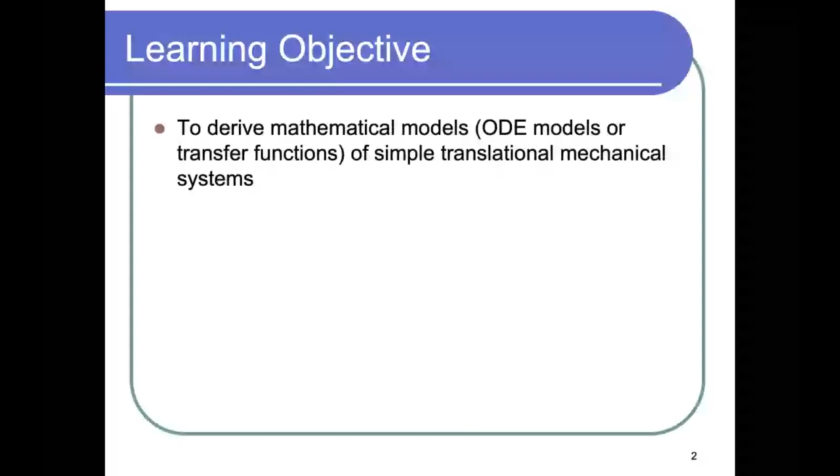So for this part, we'll talk about modeling of mechanical systems, and then we'll talk about modeling electrical systems. And then we'll start talking about differential equations and their solutions and the Laplace transform. The reason we care about differential equations in control is that usually we care about dynamics. Dynamics are things that can vary with time, and differential equations are one way of capturing dynamics. So the objective here is to derive mathematical models of simple translational mechanical systems. So the first step in the design is really the modeling step.

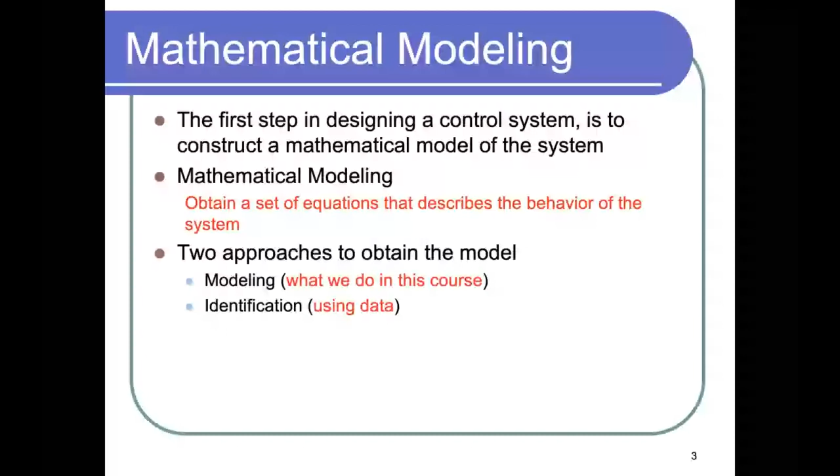And one thing that I want to mention is that modeling can be done in a physics-based approach, like what we do in this course, but it can also be done by other means. You can use machine learning, you can use whatever you want to use. There is what's called system ID, system identification. So really, you don't know how to model this. This is applicable for, let's say, social systems. You don't know the model. So you give it input data and you observe the output and you try to build the relationships experimentally.

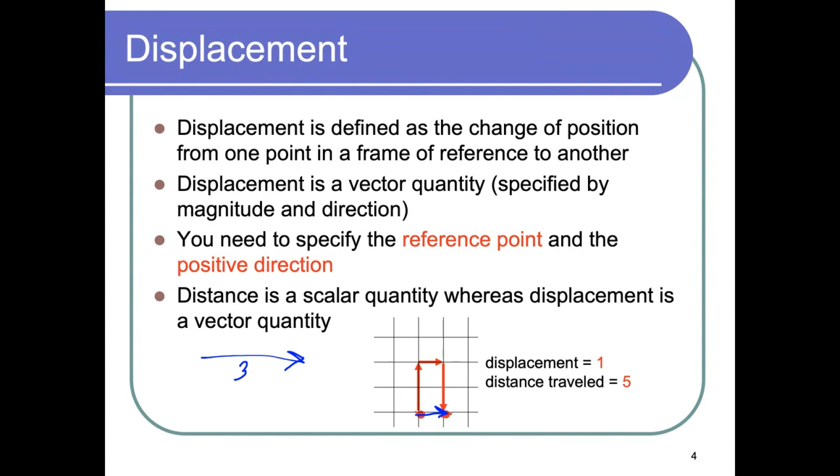So for mechanical systems, we have displacement. Really, it's a vector. It's not like distance, which does not have a direction. Displacement has a direction. So we mentioned last time that, for example, if you move from this point to this point, the displacement is 1. Why? Because you're just 1 to the right, but the distance traveled is 5. So the distance, because it does not capture the direction, has a different value than the displacement sometimes. But if I just move in one straight line to the right by 3, then the displacement is 3 and also the distance is 3. However, the displacement gives me more information about the system because it tells me the direction of that movement from one point to another.

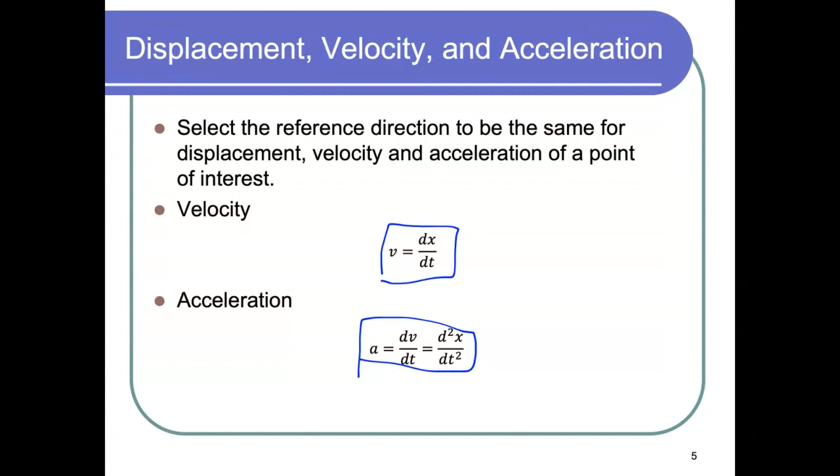All right, so with that, you have the derivative of the displacement that captures the velocity. Velocity, again, is the same as speed, but with the direction. So it's a vector. So velocity is really the rate of change of the displacement. And you can also have an acceleration, which is the rate of change of the velocity, and that is the double derivative of the displacement. So all of these things are things you saw in physics 101, but you can consider this as a quick refresher. We also need to have a reference direction, which is the direction that we consider to be positive, so that anything in the opposite direction is considered negative.

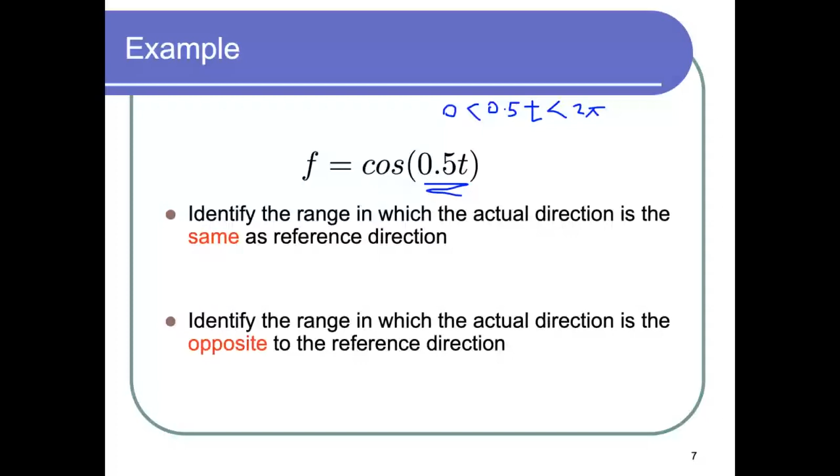We also discussed the following example, f being cosine of half t, and we identified the range of t in which the direction is the same as the reference direction, and the range in which it is in the opposite direction. So basically 0.5 t is between 0 and 2 pi, right? So for the first and the fourth quadrant, you have the range that gives you something in the same direction as the reference direction, and in the other quadrants it's opposite. But here, because you're multiplying by 0.5, you need to multiply by 2 in order to get the range in terms of t. Okay? Any questions so far?

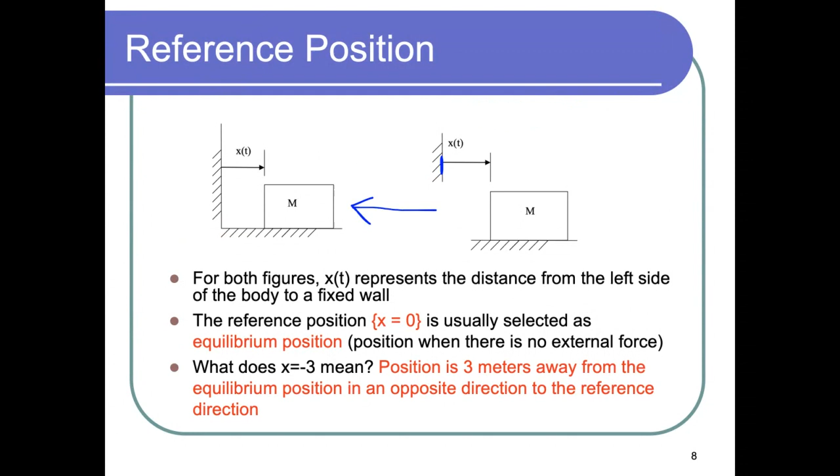So what does x minus 3 mean? Here it means that you are 3 meters away from the equilibrium in the opposite direction to the reference direction. So you are, let's say, here.

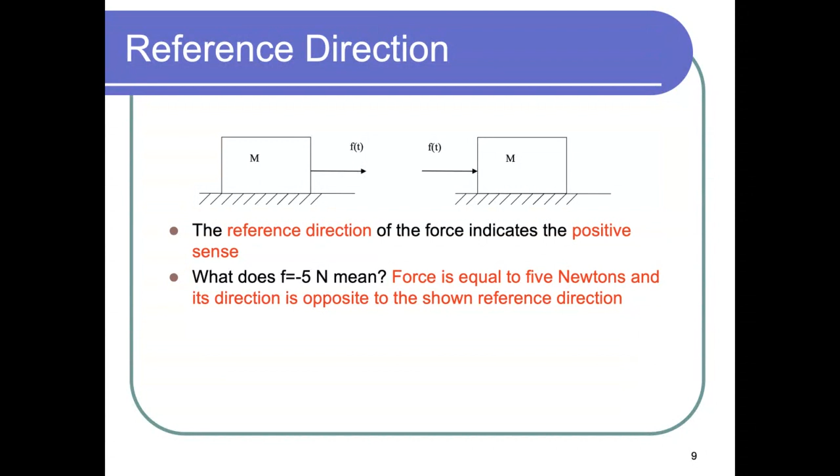Then again, similar to the distance, we have a reference direction. So we take some direction to be positive, and then the opposite to it is negative. Usually we take the direction of the movement. So if I have the force being minus 5 newtons here, it means that it is to the opposite side of the reference direction. So if the reference is to the right, then minus 5 is really to the left.

All right, so what we do here for modeling mechanical systems, we have what's called elements. They capture some mechanical phenomena. And then we study the relationships between these phenomena. And then based on that, we build a mathematical model which we want to control. For example, we use some physical devices that represent one or more idealized elements with some approximations. We use the mass, friction, and stiffness, and we'll talk about what each term here means in the context of this course.

So for the mass, really, it's the quantity of the matter in kilograms. Nothing new here. And the sum of forces applied to a body is equal to the rate of change of the momentum. So the force is really the rate of change of mv, where m is the mass, v is the velocity. However, the mass here, we don't consider it to be a function of time, so we can take it outside the derivative. But if the mass changes with time, then you do not do that. You have to consider the rate of change of mv.

Okay? Have you seen a mass that varies with time in any course? I don't think so. Okay. Yeah, but you might have that sometimes. So, I mean, it's not something we usually cover. So we'll just take it as a constant.

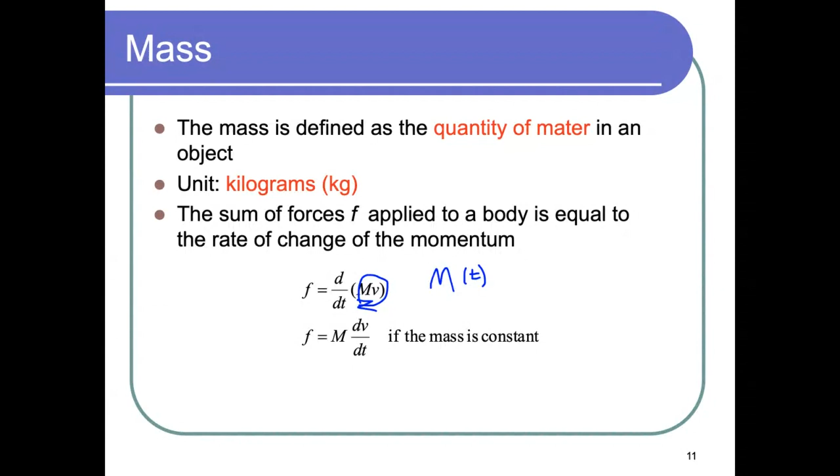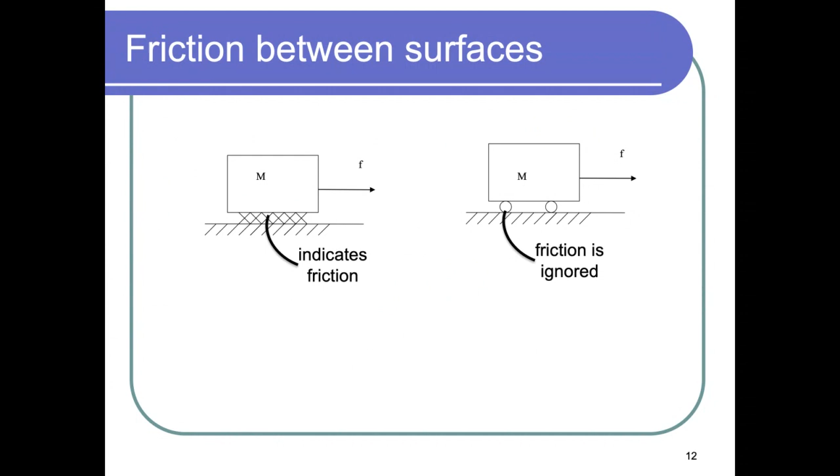All right. Then we have friction between surfaces. So we use these lines to indicate friction, and we use the wheels to indicate a frictionless area. So when a body moves on a surface, a friction force is acting in the opposite direction of the motion. Friction can be linear or nonlinear. Linear friction is called the viscous friction, which is proportional to the difference in velocities of two objects.

So what is the unit of B? B is a coefficient, right? It's a constant. What is its unit? All right, what is the unit of the force? Yes, Mazen. Newton second per meter. This is the unit of what exactly? B. Okay, you're saying it's newton second per meter, right? So how do you know that?

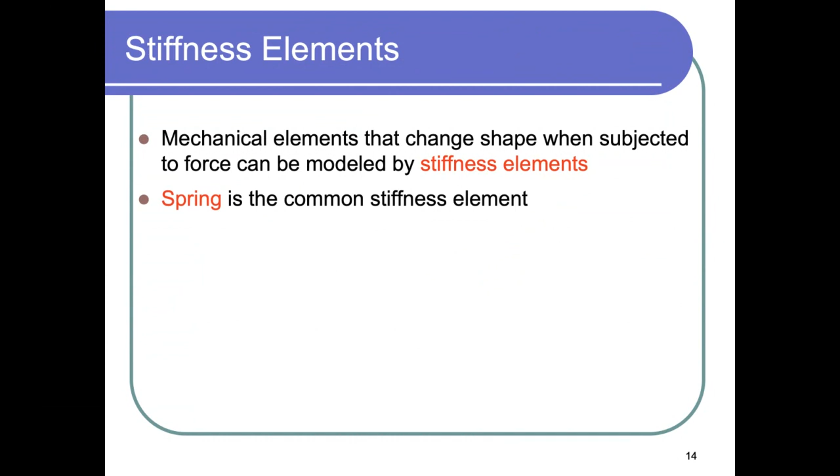All right. So we said this is how we represent friction. We represent it as B multiplied by the relative velocity. And then we have stiffness elements, which we capture as a spring. So these stiffness elements are mechanical elements that change shape when subjected to a force. Okay. And we use a spring to represent stiffness. I mean, you don't need a spring everywhere, but a spring is something that captures this kind of phenomenon.

So we use a linear spring, which is K delta X. Delta X here is the relative displacement, and K here is the stiffness constant. Similarly, we can define the unit of it. It will be in newtons per meter. So we use that because once you apply a force, the length will change. So we use the linear stiffness element, and it's sufficient for the purpose of this class.

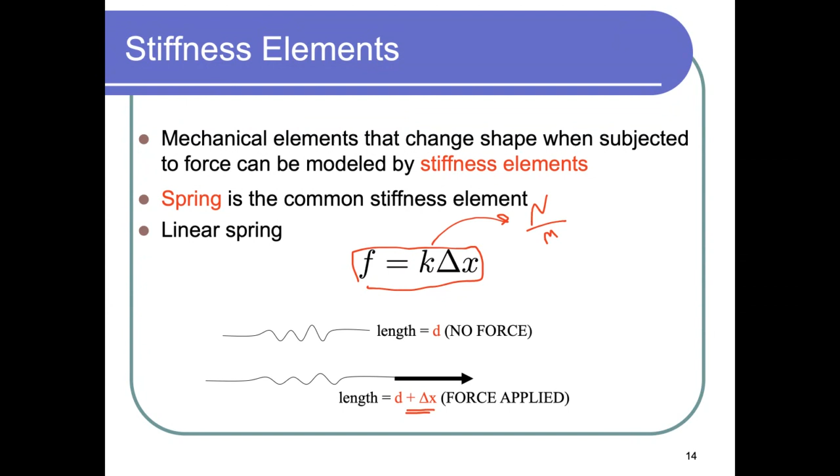Then let's talk a little bit about the energy stored. So basically, stiffness elements store energy. And this is the formula of the potential energy it stores. It's just half K, which is the constant, delta X squared. And the mass stores energy too, in the form of kinetic and also potential energy. The potential energy is really mgh, mass multiplied by the gravitational constant multiplied by the height. And then the kinetic energy is just half mv squared.

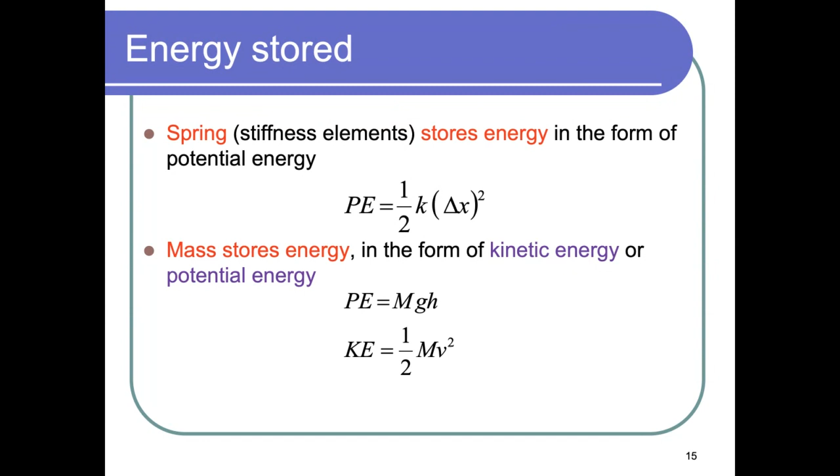Again, you have seen all of these things in Physics 101. The idea here is just to give you a quick refresher before we move to the modeling aspect. We also use dampers to represent friction, and they dissipate energy.

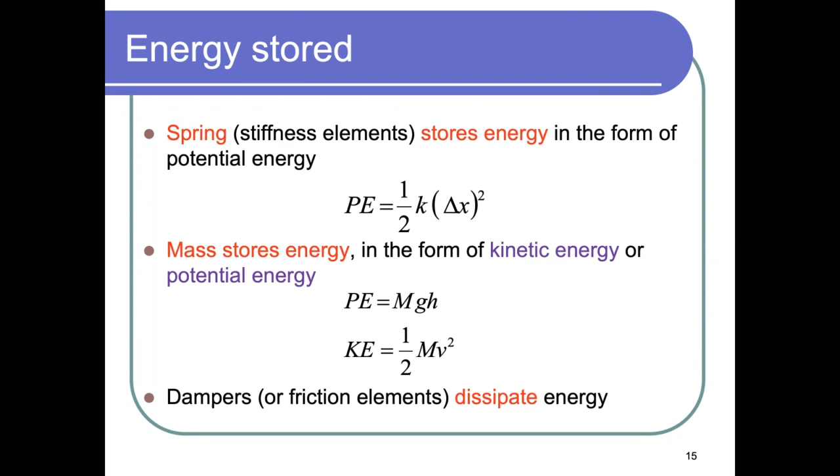So the next thing we want to talk about, maybe we dive a little bit deeper into the element laws and give you some representations of how we model them, the corresponding forces, so that once we have different elements connected to each other, we can build the entire relationship among them and have a complete model. For the mass, you have the inertial force. So it's really the mass multiplied by the acceleration, x double dot, or A.

For the spring, it's just K, the constant, multiplied by delta x. Here in this case, delta x is x2 minus x1. So we take the one to the right, as we are using this direction as the positive direction, and subtract x1. Okay.

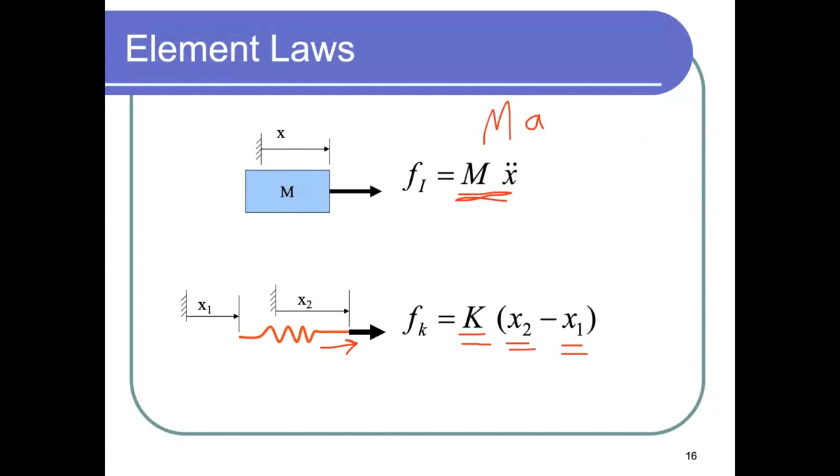Similarly, we have b x dot for the damper. This is the velocity. And if you have two velocities, if it's a moving object, then really, because we're taking the relative velocity, you have x2 dot minus x1 dot. So it's really just v2 minus v1.

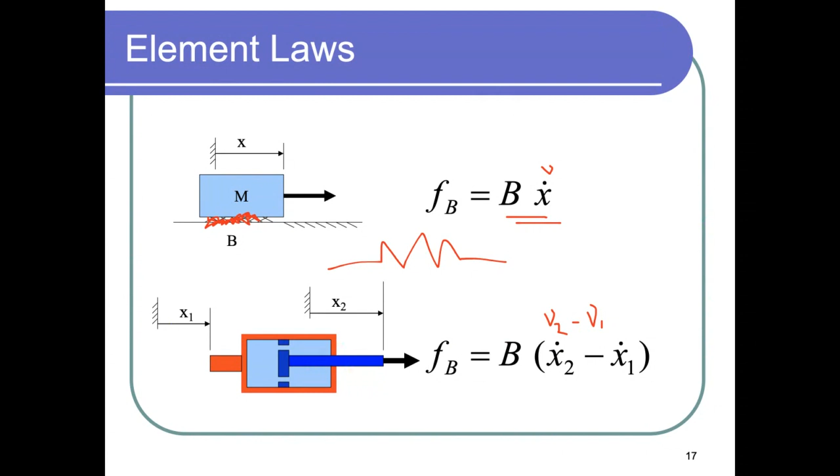Okay. So we have the laws we will use for every element. Now we want to build the relationships among these elements. So we use interconnection laws. These are really Newton's laws. Interconnection laws describe the way different elements are interacting. And then we have three important laws that will be covered here. We will use D'Alembert's law, the law of reaction forces, and the law of displacement. That's mainly what we focus on here.

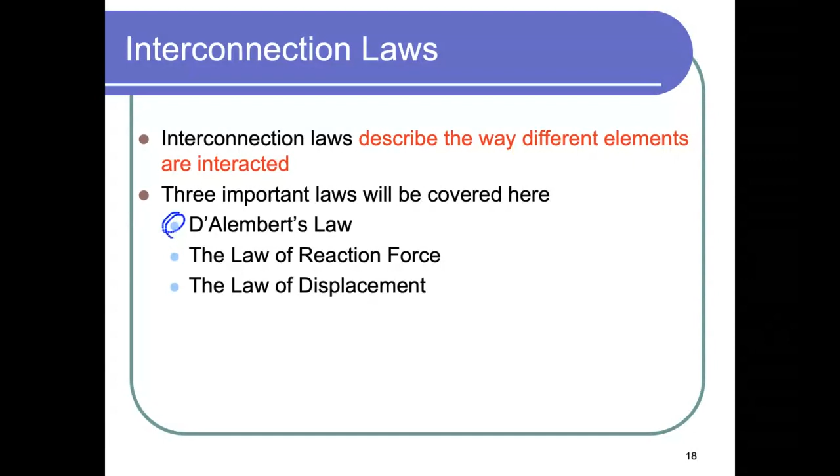So what is D'Alembert's law? First, what is Newton's second law? D'Alembert's law is really a restatement of Newton's second law. There is nothing new here. Newton's second law states that the sum of external forces is equal to the mass multiplied by the acceleration. Now, what if I consider this as an external force? I can move it to the other side and give it a negative sign. So you will have minus m

dv/dt. If you do that, we call this the inertial force. And if you sum all forces and make them equal to 0, this is D'Alembert's law. So it's really just a rearrangement of Newton's law. That's it, nothing new.

The second law is really the law of reaction forces. So it's Newton's third law. For any force of one element on another, there is a reaction force on the first element that is equal in magnitude and opposite in direction. So if I have a spring with a force to the right, then I have another force reacting to the left. This is really it, nothing new.

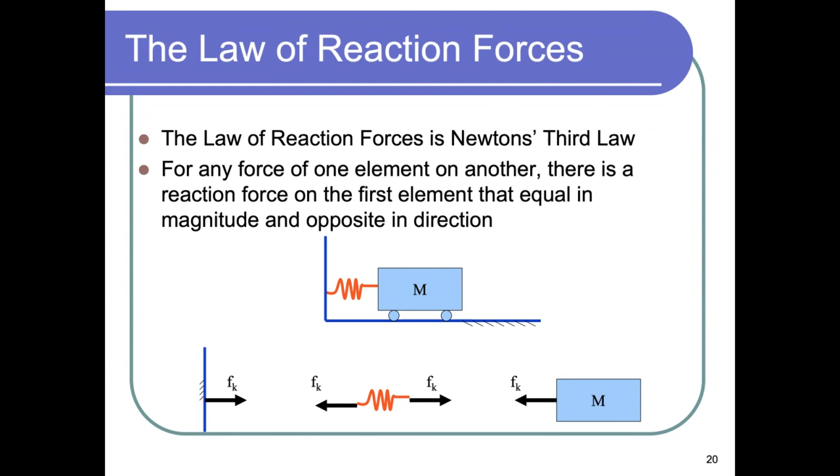Notice that the ends are connected to the same object. Then, naturally, these two elements, 1 and 2, will move at the same velocity. This is it. This is what this means. There is nothing that is difficult to see here. It's just simple and intuitive.

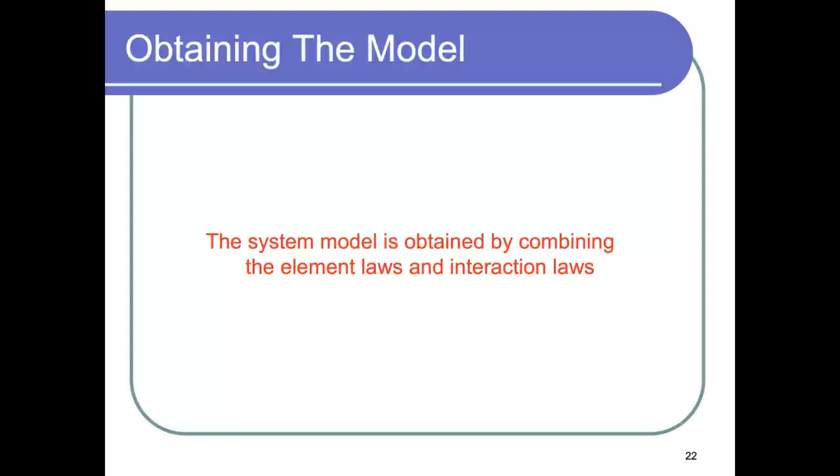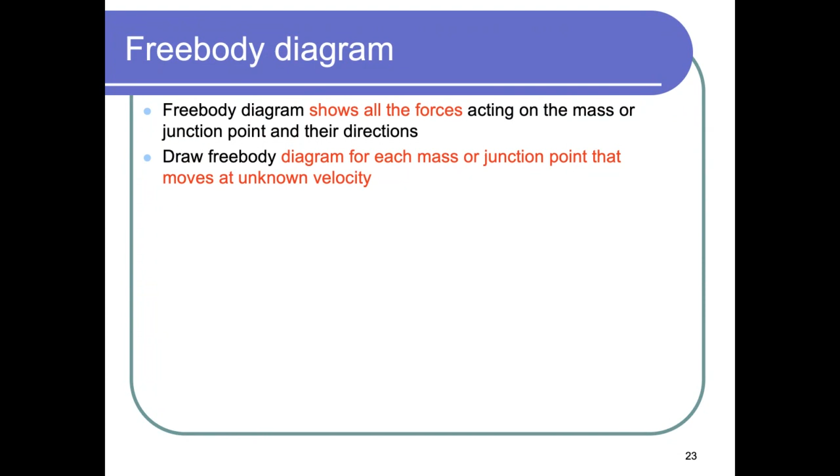So first, we need to plot what's called the free body diagram. So a free body diagram shows all forces acting on the mass. So you have a mass, and there are forces acting on it. So the free body diagram is just a representation of all forces on the mass or a junction point and their directions. So we draw the free body diagram for each mass or junction point that moves at an unknown velocity.

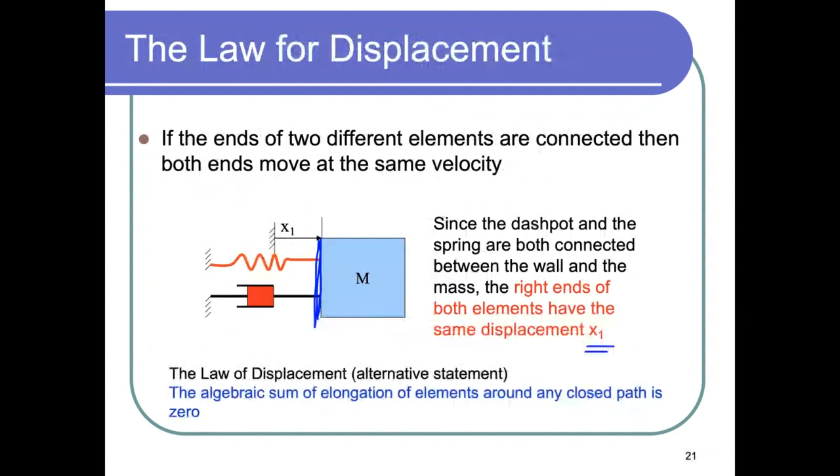Yes, Mazen. Doctor, I don't understand the force of inertia. How is it applied in this system? Okay, this is from Newton's second law. It says that the sum of all external forces is equal to the mass multiplied by acceleration, right? Now, if I move this to the other side, then it will be minus mass multiplied by acceleration. Now, back to this diagram, what are the forces that are external to the system? The spring, the dashpot, and the applied force. Because this is to the right, I can put it to the left and call it minus FA, right?

So if I want to use Newton's second law and ignore Fi, the inertial force, which is really the mass multiplied by the acceleration, is the model complete? No. It will be missing. So we have to include it. It's going to the left, so that captures the negative aspect. So if we want to apply D'Alembert's law, you have the following statement: f of k plus f of b plus f of I minus f of a, the applied force, is equal to 0, right? Yes.

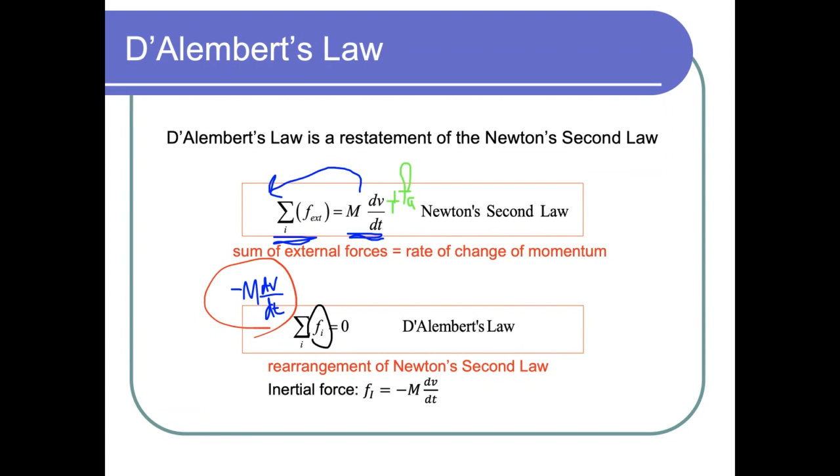But again, usually in this course, the style we follow, at least in my presentations, is what I just described, that I sum all the forces and then I put the applied force to the right. So to the left, you have everything that relates to the mass, from the system itself, and to the right, you have whatever you apply to the system. Okay? Any questions?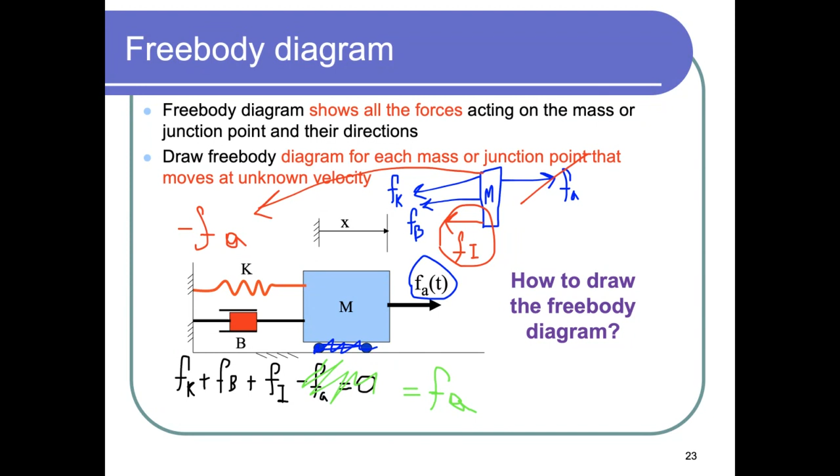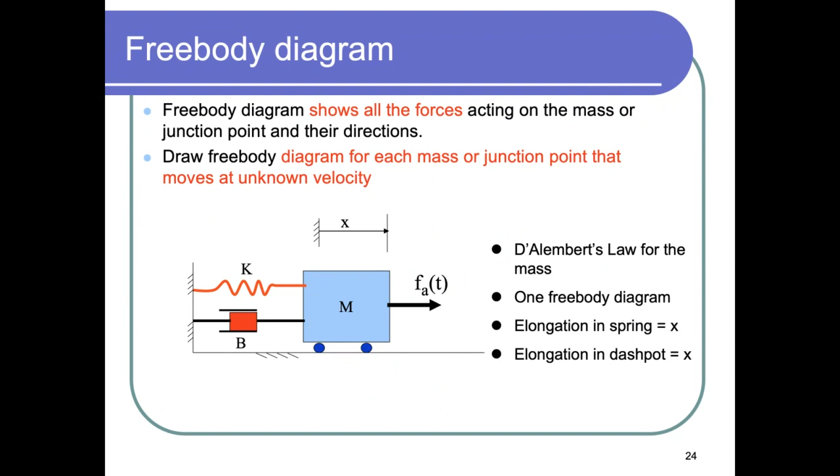Okay. Now we did this by a sketch and some little drawings. So let's have it in a more organized way. So we have D'Alembert's law for the mass. We have one mass, so we have one equation and one free body diagram. And we have the elongation in the spring, X, and the same in the dashpot.

Then these are the forces that we have. Only one free body diagram again, because we have one mass. You have force due to spring, Fk, force due to dashpot, Fb, inertial force, Fi. Notice that we have it dotted, so it's not really drawn in the system like an idealized element, but it's really important to have it. And D'Alembert's law states that the sum of all forces is equal to 0. Here we have also an external force, the applied force, so we put it on the other side. This is what we have.

And again, this external force, later you will see that it can be the control effort. It might not be important right now for you to put this applied force on one side and everything else on the other side. But later on in the course, you will see that this gives you a clean relationship and a clean mathematical representation, because once you put an input to the system, you want to study its output, so you can have all of the dynamics on the left and just the input to the right. It gives you a clean way of manipulating the equations.

Any questions so far? This is an important part of this modeling topic. So if you have any questions, please feel free to ask.

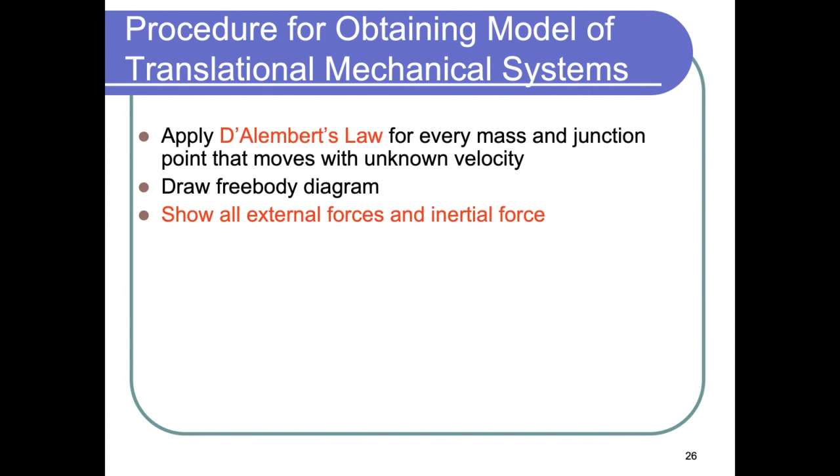Then use the element laws to express all forces in terms of displacement, velocity, and acceleration. The inertial force is represented in terms of acceleration. The force due to the dashpot B is represented in terms of velocity. And the force due to the spring, Fk, is represented by K delta x. This is K delta x. This is B delta v. And this is minus MA. So every force relates to displacement, velocity, or acceleration, depending on the force and the assumptions we're using in this course.

Okay. Any questions?

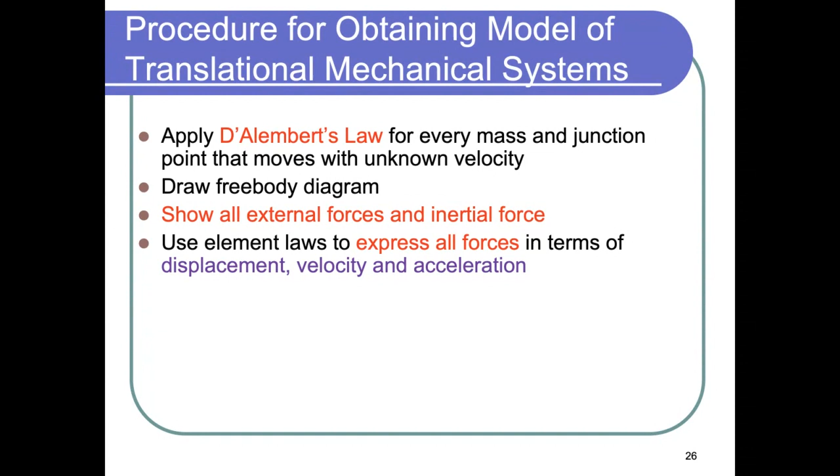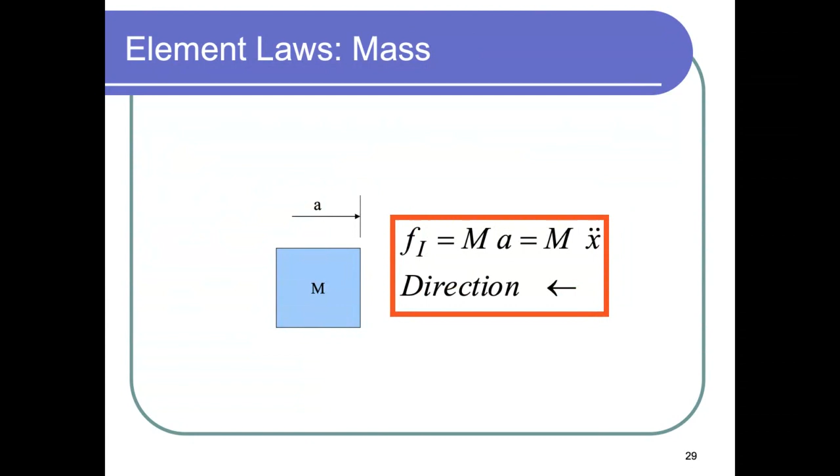All right. So again, these are the element laws. For the spring, we use Kx. Fk is Kx, and the direction is to the left. For the dashpot, we use Bv or Bx dot, and the direction is to the left. For the mass, we use Ma, and the direction is to the left. So mx double dot.

So this is the relationship of the system. Fk plus Fb plus Fi is equal to Fa. Kx plus Bx dot plus Mx double dot. The forces on the left equal the force on the right. So the system is really balanced. Does it make sense?

Yes, Abdulillah. Doctor, if instead of pulling the object, we push it towards the spring, what will change? Fk and Fb, right? Can you repeat the question, please? I didn't hear you very well. If instead of pulling the object, we push it towards the spring. Instead of pulling the object to the right, we push it to the left. What will change?

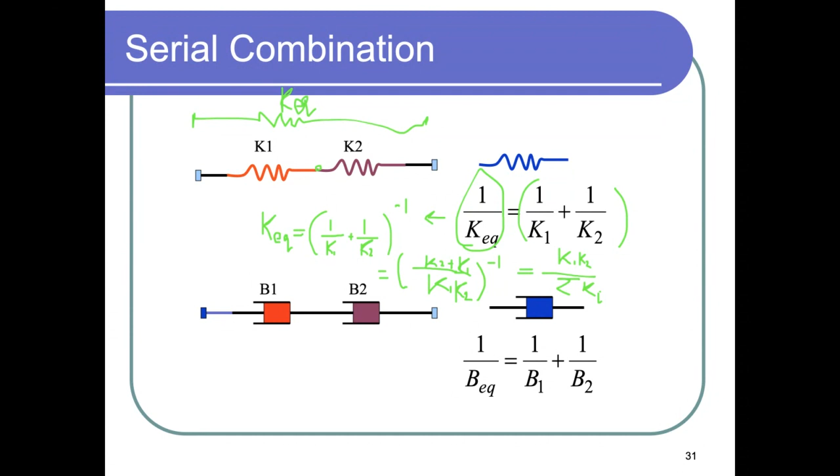So let me give you maybe 5 minutes, okay? And ask me anytime if you have any question. And after 5 minutes, we will try to solve it together. So you have until, let's say, 12 p.m. sharp. Is the question clear?

Great. All right. Again, usually in my course, I will ask you to solve some examples and exercises to help with the learning process. So please, when you attend my lecture virtually, try to have a piece of paper and a pen, or if you have a tablet or whatever you want to use, in order to try these small exercises in the lecture.

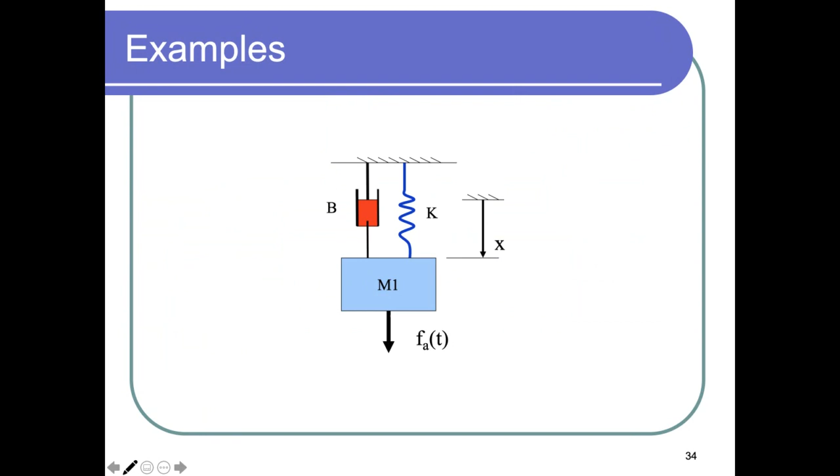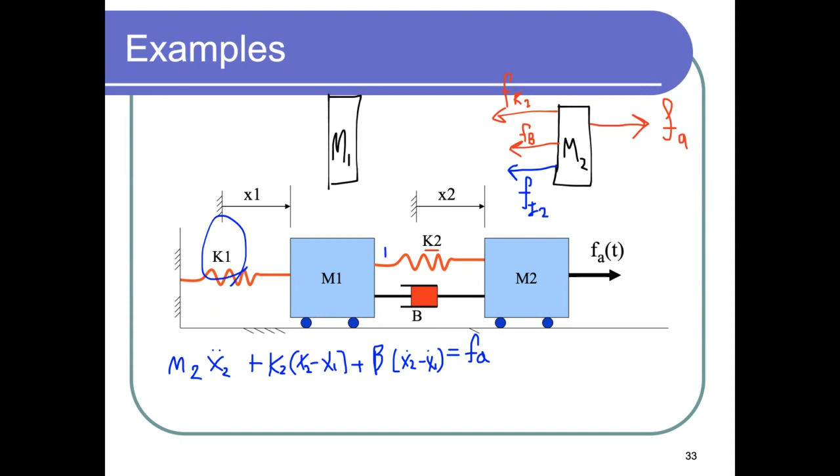Yes, Faisal. Doctor, what about the force of K1? Because it's affecting M2 in an indirect way, right? Yes. So we will have another equation for mass 1, and it will have a free body diagram, and we will have another equation. In that equation, we will have K1x1. Okay? So the first equation here is just for the mass 2. Then we need another equation for mass 1. Okay, makes sense. Okay, good.

Speaking of which, let's, okay, somebody has a question. Yes, Ryan. Doctor, does the spring have a weight? Because if we can add the two masses together and make a third equation. When you want to add the two masses together, you treat them as one body, let's say. I see what you mean. So you may do that, but you need to be careful.

There is no unique way of representing the forces in the system. However, the way we are representing here is really a clean way of doing so, and you might avoid possible mistakes. However, because we will have two equations describing the dynamics of this mechanical system, you may manipulate these equations the way you want to manipulate them. It's up to you.

So for the spring, we don't consider a mass for the spring. We just have the spring affecting the displacement. This is how we deal with it. We don't give it a mass. Okay? Because the spring here is really, we're not looking at just a spring device. It's something we look at to represent stiffness in the system. Okay? Clear, thank you. No problem.